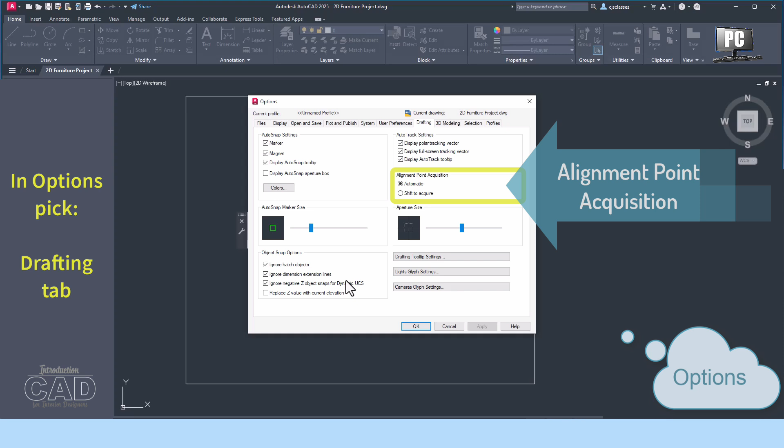At the command line, type Options. Let's start with the settings by picking on the Drafting tab. You will want your settings to match mine in the AutoSnap and AutoTrack settings. Make sure that the alignment point acquisition is set to automatic. Pick on the User Preferences tab next.

Pick on the right-click Customization button. AutoCAD uses the right mouse click feature to assist your workflow through the use of many menu options. You will have several options here related to the right button of your mouse device.

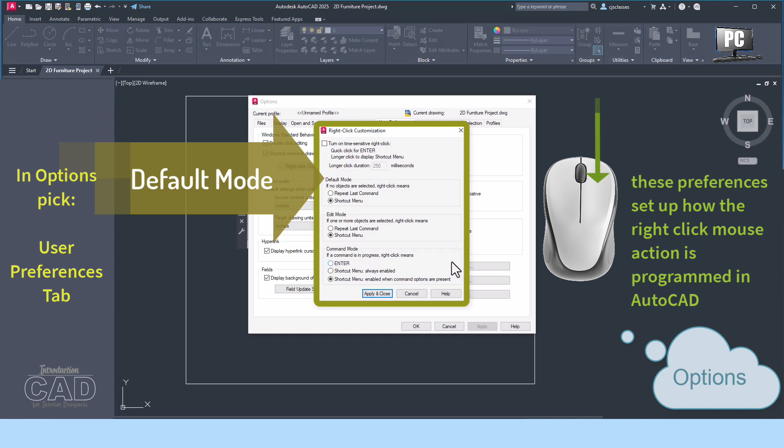Under default mode, if no objects are selected, right-click means a shortcut menu will appear. Some AutoCAD users prefer the right-click to be programmed to repeat the last command instead. I don't recommend this for beginners. The Enter return key on your keyboard will also repeat the last command. So perhaps stick with the right-click to mean a shortcut menu will appear.

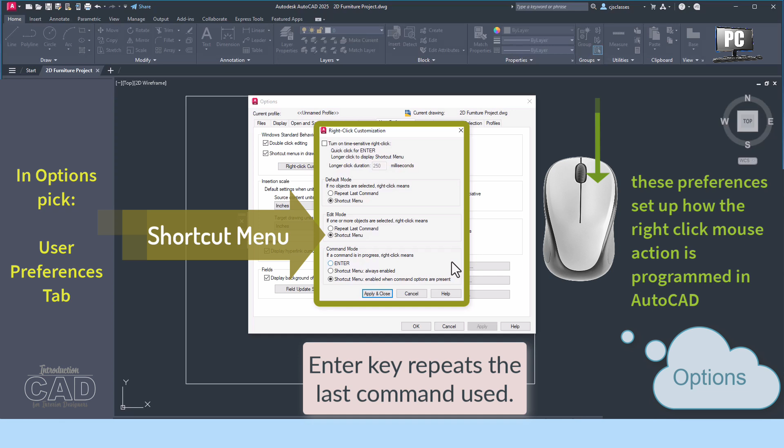Under the Edit mode, if one or more objects are selected, right-click means Shortcut Menu is checked. Under the Command Mode section, if a command is in progress, right-click means Shortcut Menu enabled when command options are present. All of these options are now consistent with the right button of your mouse being used with the AutoCAD command mini menus. Pick Apply and Close to go back to the User Preferences tab.

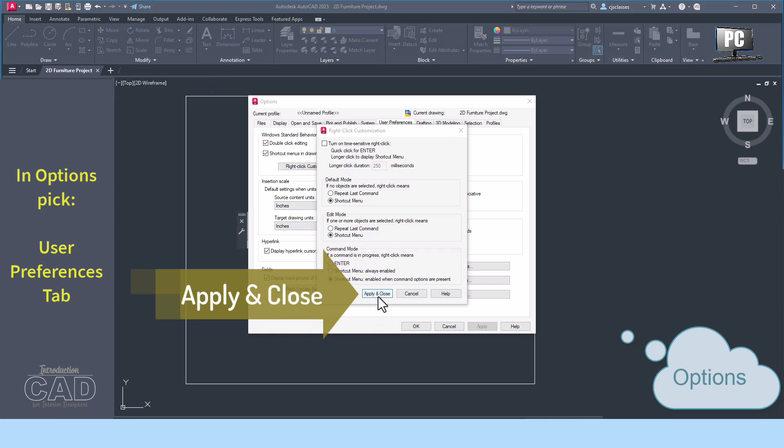Still on the User Preferences tab, and moving on to the Insertion Scale definition, make sure both drop-down menus are set to inches. For the hyperlink definition, check the box entitled Display Hyperlink Cursor, Tooltip, and Shortcut Menu. In the Associative Dimensioning field, check the box Make New Dimensions Associative.

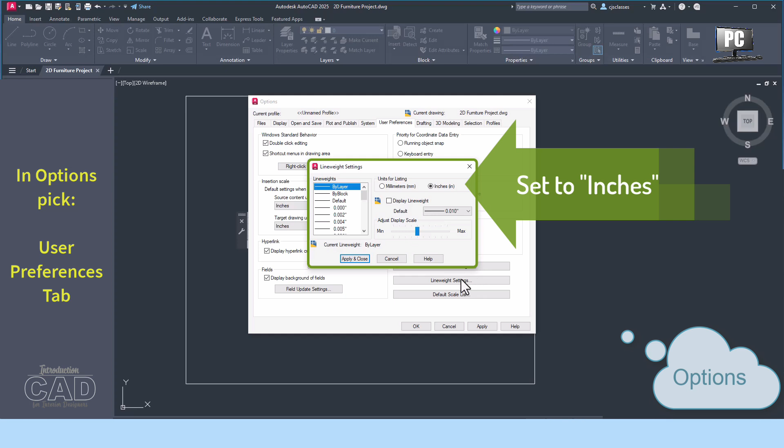Look to the bottom right-hand corner and pick on the Lineweight Settings button. Choose inches as the default line weight setting. This will match the line weight chart provided for the layer assignments that we'll use in the course. Pick Apply and Close if you made changes here.

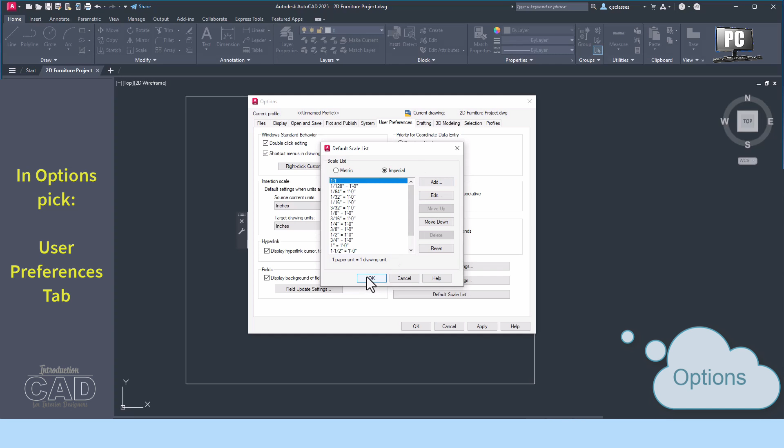Next, pick on the button entitled Default Scale List. Be sure that the drawing scales are set to Imperial. We will not edit the list shown here, but just know that you can add or delete scales from this list. Pick Apply and Close if you made changes here.

Pick on the Block Editor Settings button next. You should stick with the default settings for this category, which should have the following boxes checked: Highlight dependent objects during selection, Display tick marks for parameters with value sets, and Display action bars. Pick OK to exit this screen.

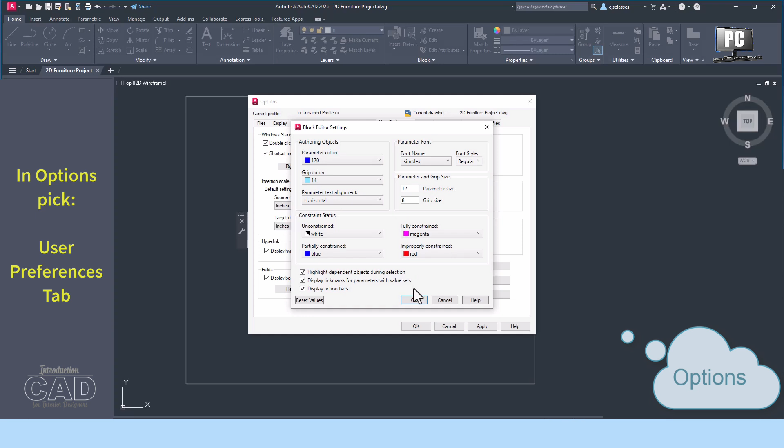For the rest of the settings, as long as yours match mine shown here, you are in good shape for this tab. Go to the Selection tab next.

I'm going to recommend one change here. For beginners, I recommend unchecking the box entitled Allow Press and Drag for Lasso. This selection method is very difficult to utilize as a beginner learning AutoCAD. I recommend using the selection boxes and grips before trying to tackle using the lasso selection tools.

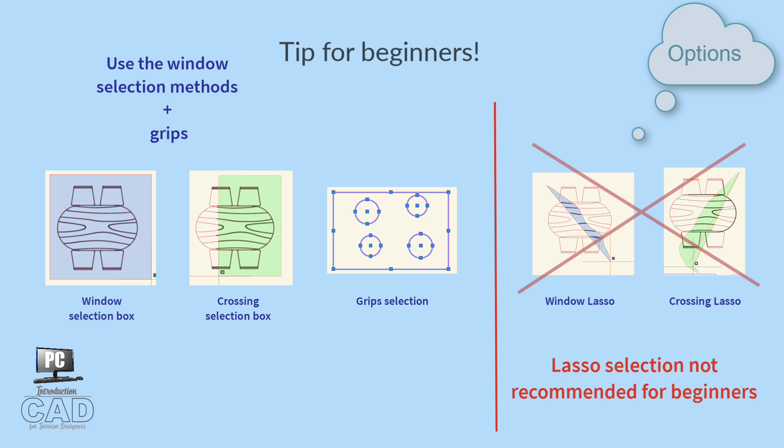The Display tab is where you make changes to how model space, paper space, the cursor, and the crosshairs look on your screen. Under Color Theme, you have two general options: light or dark themes. Most of my videos for PC AutoCAD are shown using dark theme, whereas the videos for Mac AutoCAD I demonstrate using a light theme interface. Take note of my settings here if you want the graphics on your screen to match my videos.

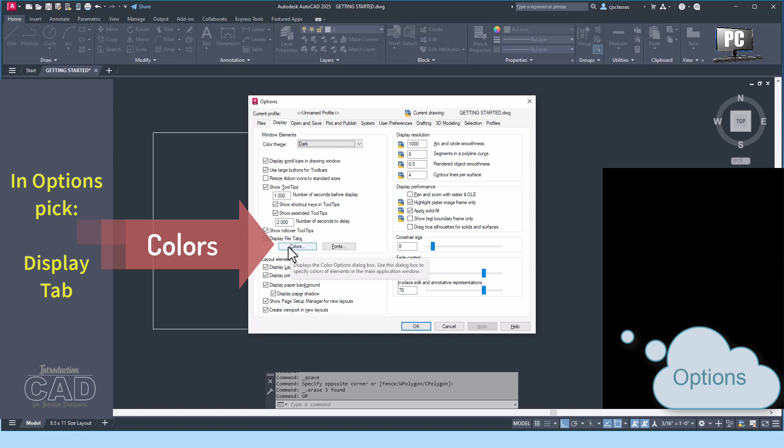Locate the Colors button on this tab. This is where you personalize the entire color scheme for AutoCAD PC. Pick on the Colors button. You have two columns here that you're working with to customize. The left-hand column are the general categories. Pick on these one at a time to explore your options in the right-hand column.

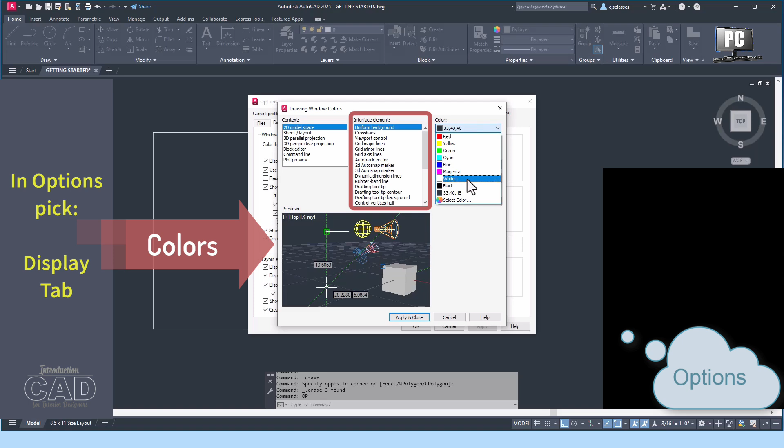You can control the color of the 2D model space environment. You can also change the crosshairs color of the cursor. Pick whatever color you can see best. AutoCAD is visually intensive as you are working with hundreds of lines and minute details. Over time, you will dial in your own color preferences that make your workflow in AutoCAD more comfortable and hopefully will create the least amount of strain on your vision.

The next tab to bring to your attention is the Files tab. This tab is key to how AutoCAD PC is organized and where the features are located. AutoCAD PC is much more customizable than AutoCAD Mac. In the intermediate and advanced classes, you will explore more about these features. For now, it's simply important that you know where to find your autosave file should the DWG file in AutoCAD crash and close on you in the middle of a work session.

To do this, locate the Automatic Save File Location folder and pick on it to expand. You can see on my screen where the files will be automatically saved, which is the file folder on the local hard drive of my computer entitled Temp.

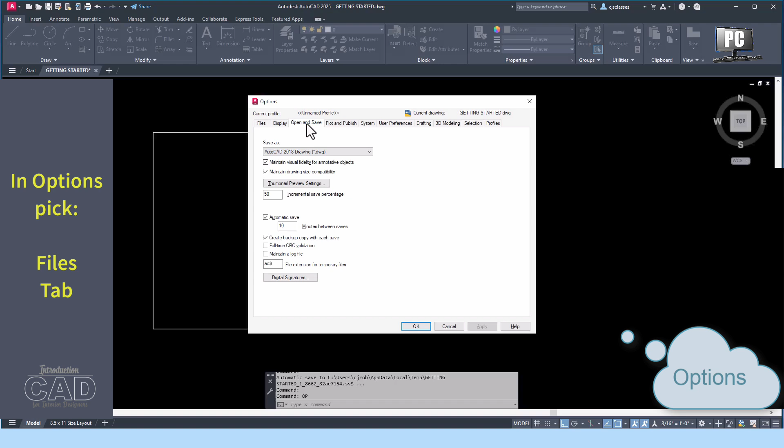Moving along to the last tab covered in this video, pick on the Open and Save tab. Under the first section of this tab, you will see which file format you are saving your AutoCAD file as. In this case, although I am currently working in AutoCAD 2025, the most recent file format is being saved as AutoCAD 2018. So any file you work on that has been saved from AutoCAD versions 2018 through to 2025 is actually saved in the same file format.

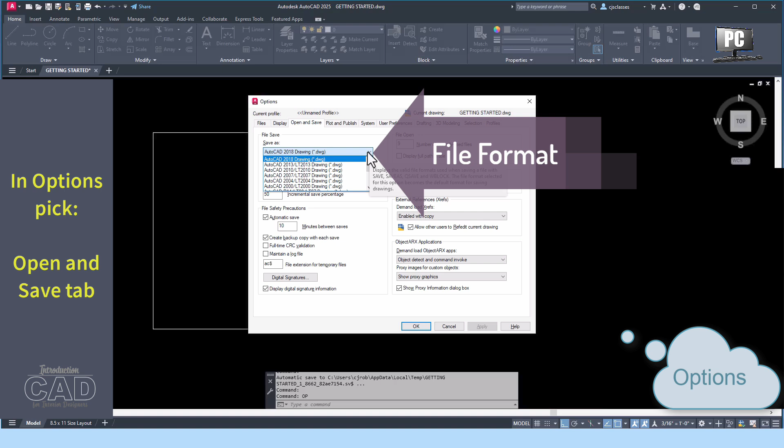However, if you are sharing files with a colleague or contractor that is working in a file format older than AutoCAD 2018, or if they're using AutoCAD LT, you will have to make a copy of your DWG file and save it to the file format that the recipient of the file has in order for them to open the file on their end.

The last feature that I need to bring to your attention is the file extension for temporary files. On the previous Files tab, I showed you where to find the autosave files that you have in a temp folder located on your local hard drive. This last bit of information will be very useful to you in conjunction with that file you're looking for.